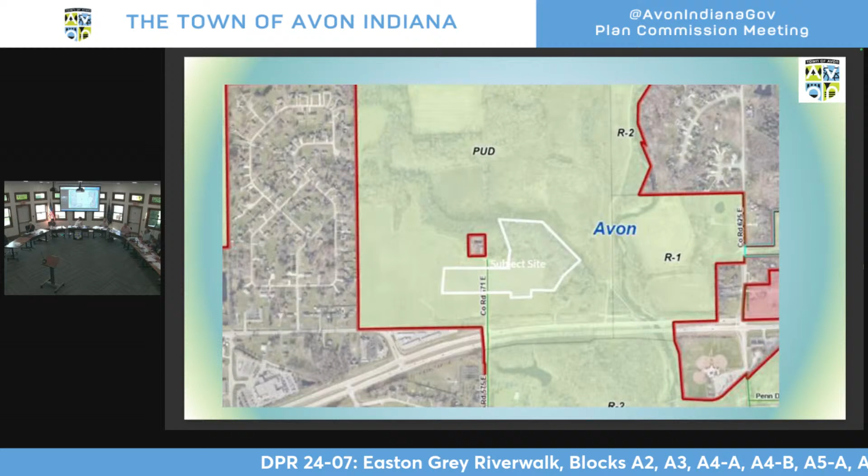This is a map showing the zoning, which is PUD. The white outline is roughly where this will be. That's my rough drawing of on the map where the actual buildings are being located.

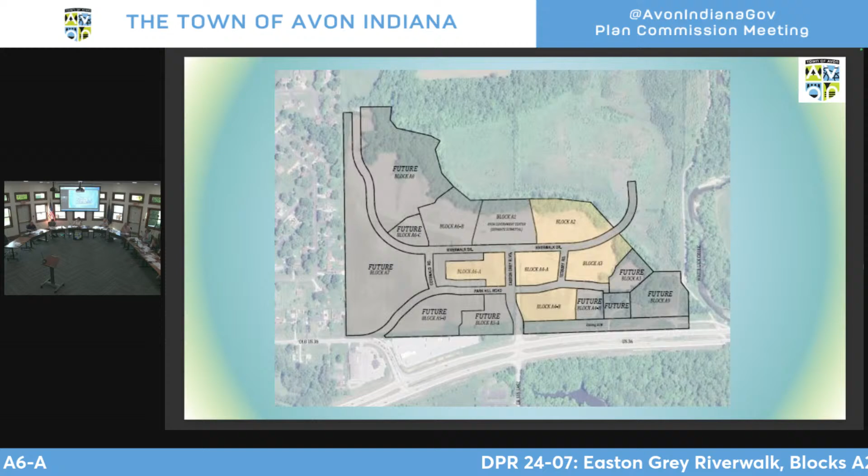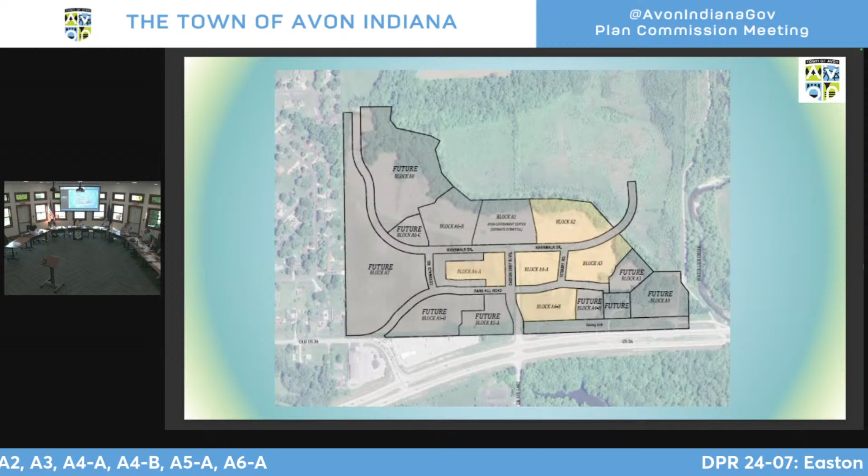So this is the Easton Grey development, and the ones in yellow are what specifically are being requested to be approved here. Again, the streets that are shown here were already approved and are being developed right now. And then this will be for commercial and multifamily buildings.

This is their layout. So you have Easton Grey Boulevard coming in off of 36 here. 4 mixed-use buildings, so that is commercial on the first floor with multifamily on the upper 2 floors. And then the remainder of the buildings throughout here would all be multifamily buildings plus the clubhouse for the multifamily buildings.

When I spoke about it being reduced from its original proposal, they had originally filed for all of Block A4B, and then for Block A5A over here, which they have since removed and will be presented to you at a later date with a different DPR proposal.

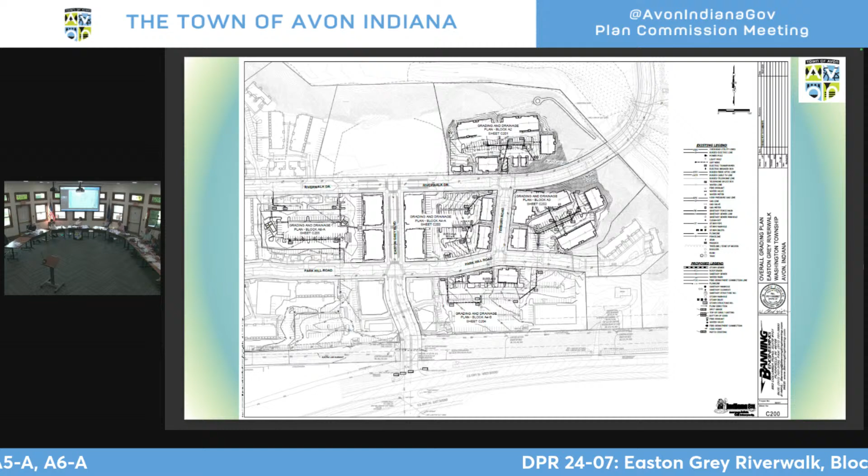This is just another layout of the overall buildings and the parking. There was substantial development standards laid out in the PUD for how these buildings needed to look and be developed, including minimum setbacks. So you see the buildings are all set up to the street to create a town center type environment with reduced setbacks for the multifamily buildings, 0 to 10 feet along the streets.

These are elevations. There were some fairly detailed restrictions on building elevations, and these are the proposals, which do in fact meet all the standards that were laid out in the PUD.

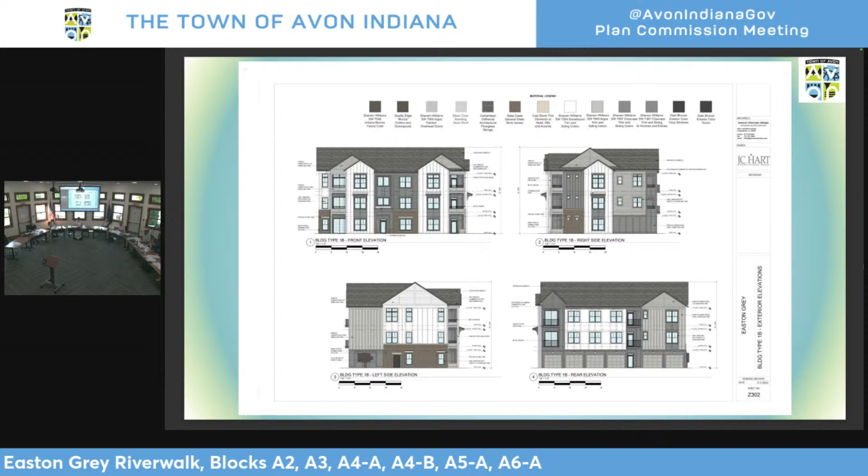This is all 4 facades for this one building type. And you can see the fronts look fairly, very good. And then the backs, we believe, look just as good as the front. So we're appreciative of this design and layout.

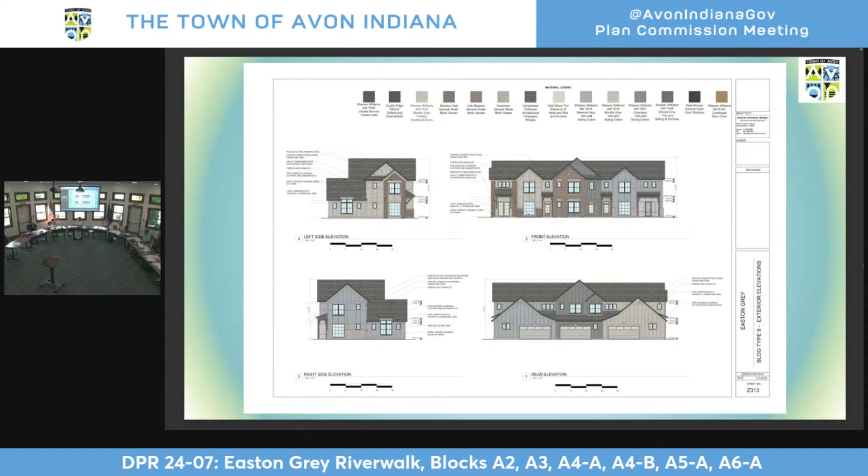This is an example of the 2-story buildings. So there will be several of these. They are townhome style with 2-car garages and 1-car garages.

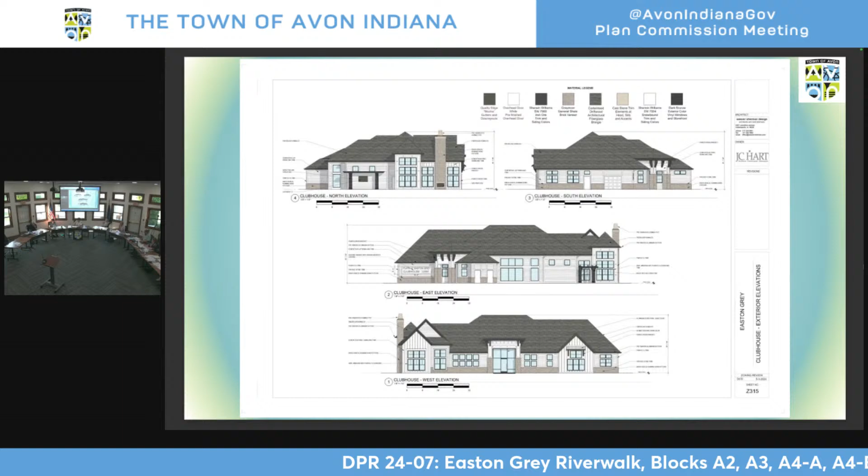This is the clubhouse. This is the only 1-story building being proposed, although it is approaching 40 feet. It is 1 story. But that will be the clubhouse.

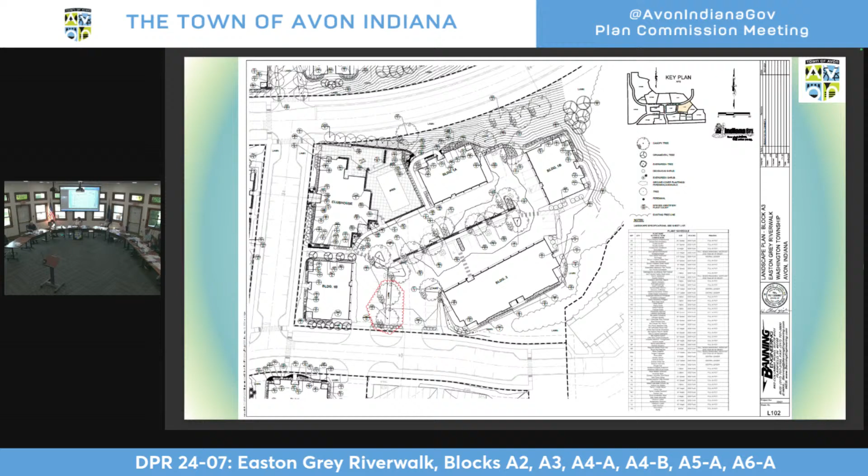I put a few drawings in here for landscaping because these drawings do differ from what you received in your packet. It's a little hard to see here, but some of the parking landscaping didn't meet the standards that were in the PUD. So they've added 2 trees here on the next. They've added 4 or 5 trees here and then 2 down here.

And then 1 tree up in here. So that would eliminate condition number 2 that was provided in your staff report, that they submit a revised landscape plan, since they've already done that for you tonight.

This would be the first 21 buildings of the Easton Grey Riverwalk District: 4 mixed-use buildings, 12 2- and 3-story multifamily buildings, 4 single-family detached townhomes (3-story single-family homes), plus the clubhouse I spoke of. The petitioner has met all standards of the PUD and the UDO, and the landscape plan I showed you earlier now complies with town standards and the PUD.

So we are recommending approval subject to the 3 standard conditions, which again removes original condition number 2 in your staff report. I'd be happy to answer any questions you have. I know it's a lot to take in.

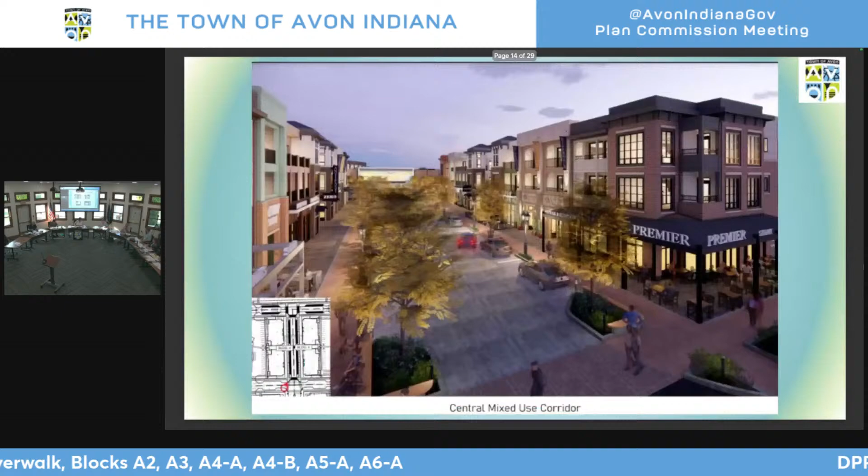So Riverwalk Drive is actually the road that takes us into the development. On the overall site plan, where does the town hall and event center sit? To the right, Easton Grey Drive is the one that comes in off of 36. Riverwalk Drive is the east-west one. And the town hall is right here. Got it, thank you. You're welcome.

Was there a reason why the other section, I think you said block A5, was removed? Is it that they just want to do a smaller portion at a time, or were there other concerns? I'm not sure, maybe the petitioner would be better to respond to that question.

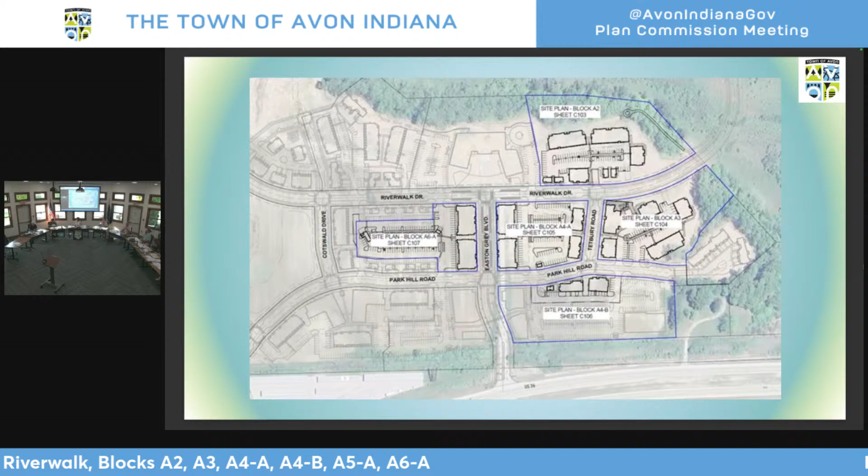Any further questions for staff? If not, we'll ask the petitioner to come forward.

Good evening, Lance Farrell, Banning Engineering, 853 Columbia Road, Plainfield, Indiana. I have my team here tonight: Representative Randy Sherman from Weaver Sherman, the architects; a representative from J.C. Hart, Chandler; and Sean from Republic.

Linda has once again stolen my thunder with the pretty pictures and the details. Greg, to answer your question—do you have my presentation? Is that it? We'll go through the first four at least.

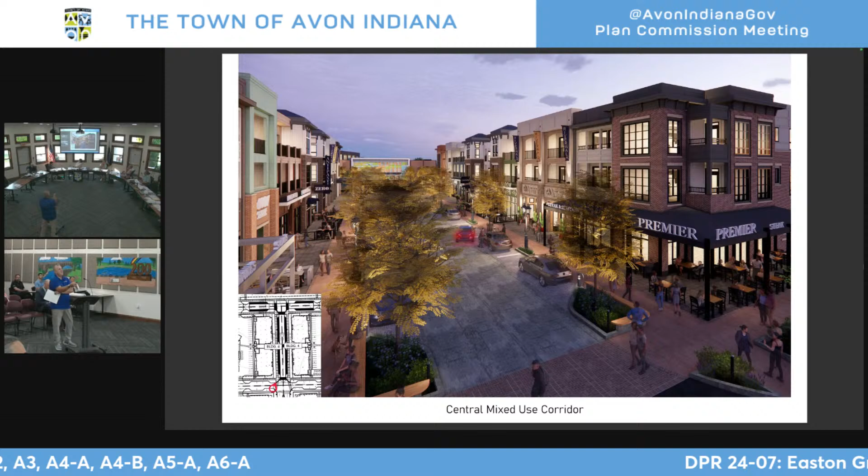This is standing, looking due north of the main entrance. In the far background would be your new government center. On the left and right would be commercial on the bottom and residential type stuff on the top. As you can tell, we're trying to make this a downtown walking community area where people can exercise, walk down, go to wherever they want as a consumer, and other people would like to live there.

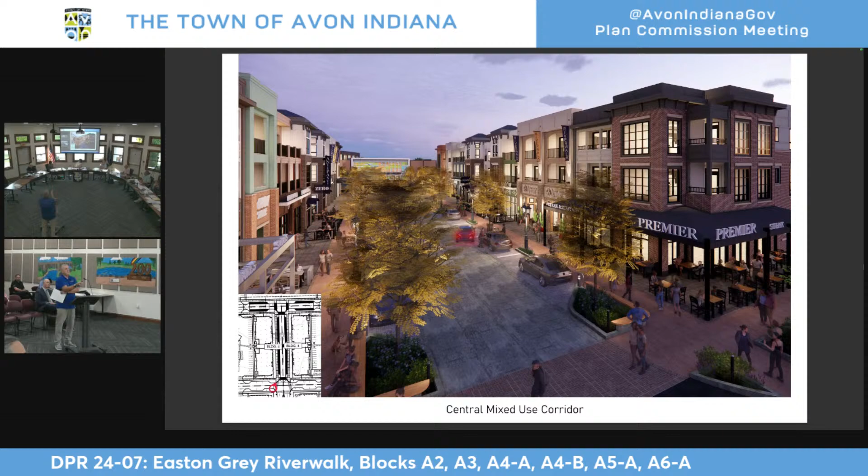I wanted to go over this because when you got your packet, we had 80-some sheets in the set of plans, but the picture tells a thousand words. This is the same thing, just another step back towards 36 Rockville Road, showing there's two series of buildings that look like this to create that downtown boulevard. Again, it's a left and right type of a thing.

As she said, I was going to try to answer some of the questions I've already heard. We worked with staff and reduced one of the blocks for construction type purposes. The other block to the left, we were probably not quite ready with the tenant we had talked with that wanted to go in there, that we'll eventually get to — that's the one on the left, near your main entrance drive.

Again, tonight we're just here for these yellow blocks. The infrastructure is going in as we speak. These are basically blocks or pods that have the buildings, the parking lot, the landscaping, all the utilities.

As far as the landscaping goes, one of the things we talked with Linda about is we actually got so much landscaping that it would overgrow itself. So we asked if we could do different types of plantings — street trees on the infrastructure, and where parking comes up to it — because in 5 to 10 years all those trees would hit each other. So we rearranged some of that and worked with Linda, and we really appreciate her working with us on that.

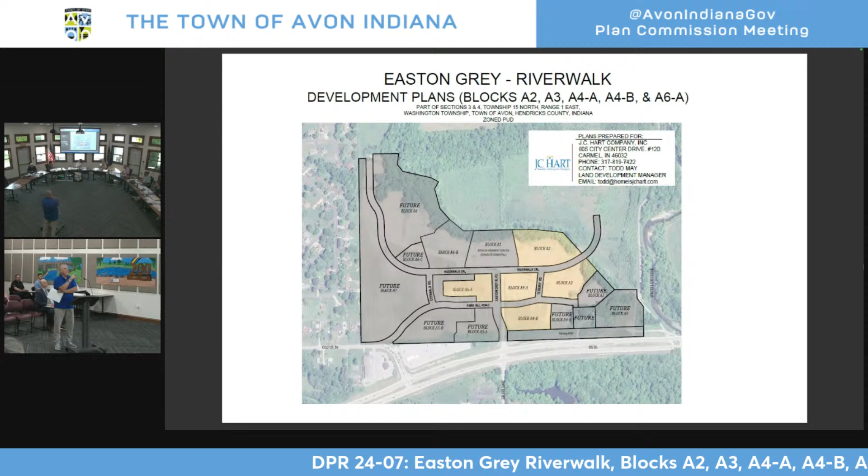I don't know if you were at the ground breaking for the infrastructure — one thing John Hart of JC Hart said that was really impressive to me is that when they do a development, they don't boilerplate it and move on to the next town.

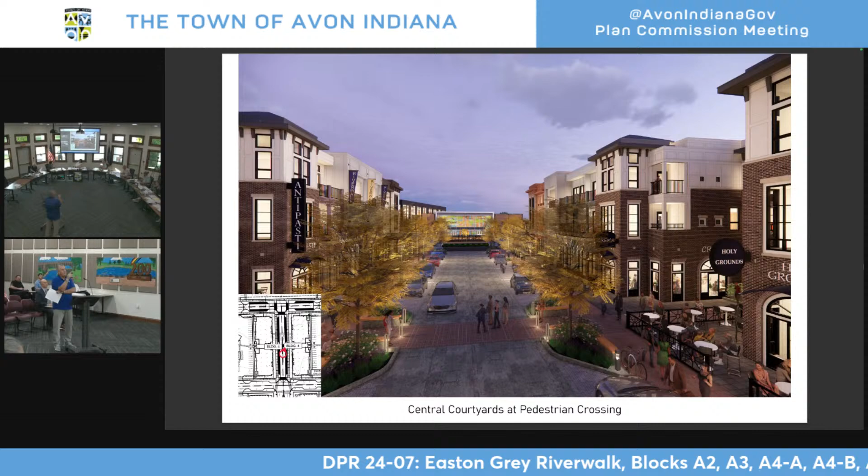This right here that you're seeing through these photos are specific for Avon, the town of Avon. They might take something on the inside, but what you're seeing here is going to be Avon specifically only. And I can tell you this team has met twice a month since before Christmas on the most delicate details of colors, shutters, stuff like that. So myself, I'm proud of the way this is going to look, and I'm proud of what this is going to do for the town of Avon.

So I don't have anything else. I'd be willing to take any questions, but I was hoping I got through what you guys were after.

Questions for the petitioner? I certainly fall in love with the renderings, so continue. This is very exciting to know that we're going to have a dedicated downtown. And I agree, I love the renderings and I love the look and I love that it's going to be pedestrian friendly, and that you all have been very proactive with working with us. We always get a little irritated when we hear that petitioners are not wanting to be cooperative, and you all appear to be extremely cooperative. So we appreciate that.

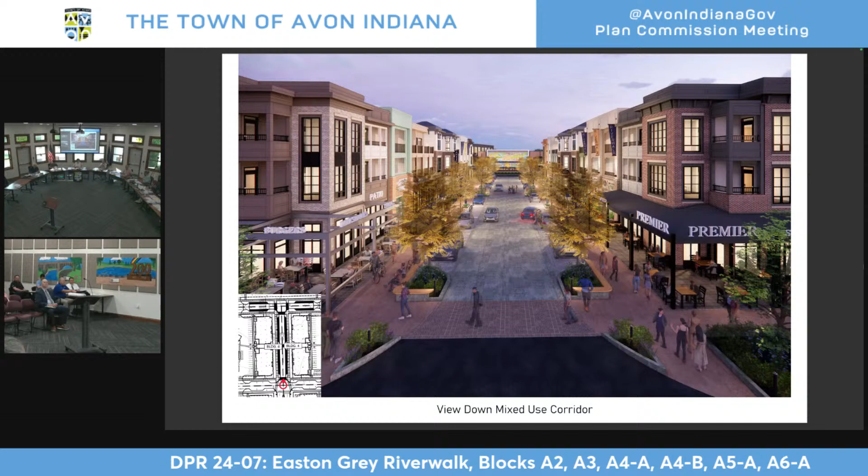Discussion? Nope. Anybody in the audience who would like to come forward and speak in favor of this? Anybody who'd like to come and speak against? Would you like to remonstrate for the people who did not speak for or against? Yeah, okay. Discussion.

You're happy with this, Linda? Yes, sir.

I make a motion we approve DPR 24-07 Easton Grey Riverwalk Blocks A2, A3, A4-A, A4-B, A5-A, A6-A, as amended. A development plan review to approve multifamily housing and commercial development, subject to the conditions proposed by staff within the August 26, 24 staff report, since it has satisfied all the requirements for a development plan review under state law and subject to the approved findings of fact.

Do we have a second? I'll second. Having heard a motion and a second, we'll take a vote. Ransberg, for? Guggenberger, for. Reed, for. Zuzen, for. Kaufman, for. And the motion carries.